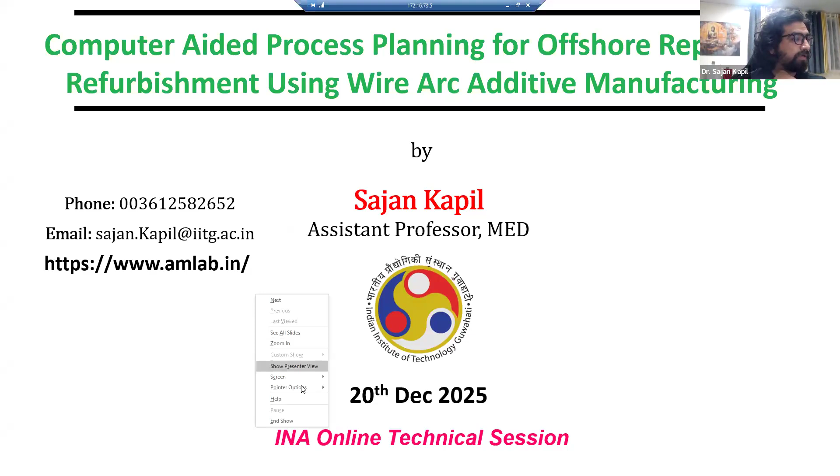So I'll be talking about computer-aided process planning, particularly focusing on the offshore repair and refurbishment using Wire Arc additive manufacturing. In this particular talk, I'll be going through first an introduction to additive manufacturing, which will be very brief, so that we are on the same page when I say a few terminologies. And then after that, it will be more focused on underwater application. That will be today's goal.

So I'll start with this video, which I typically do. These are the birds known as swiftlets. These birds are building their nests. They are using their saliva to deposit material. So unlike the conventional way of building nests like other birds do, these birds are utilizing the method of additive manufacturing.

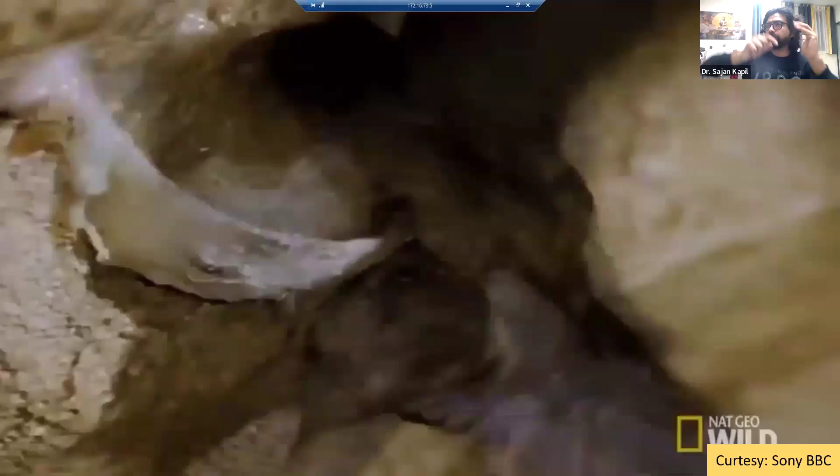This is 3D printing, where you are using any base, which may be a straight base or slanted base. Like here in this case, it is a cave, which is not straight but slanted. And then they are building their nest onto that. What does it require? Of course, the material is known to these birds. The requirement is the skill to deposit material, where to deposit, how much to deposit, so they get the shape. This, in the modern world, may be called computer-aided process planning.

If these birds are replaced by robotic arms and these materials are replaced by some other material, let's say metal, we choose additive manufacturing. This is a classical example of additive manufacturing in nature, but we do not really promote pursuing anything and everything by 3D printing in our lab. And this is another example.

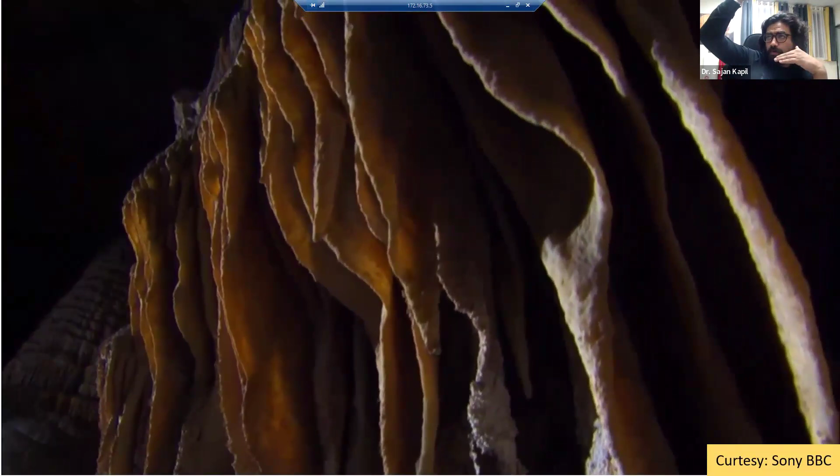This is an example where the water leaves the limestone cave. It falls from the roof onto the floor of the cave. When it does so, it leaves material behind in two places. One on the top, that means on the roof, another on the base, I mean the floor. These two material depositions keep growing, and they meet. And that's why in the caves you see those column-like structures.

These column-like structures are not made by removing material. That means the water did not cut away the excess material by its flow and give the shape to these columns. No, they are deposited. These structures you can't really get by conventionally removing material. You have to go with 3D printing. But there's a challenge. Growth of this particular structure is a few microns in a year. And that's how 3D printing typically is, right? It's sometimes expensive, sometimes very time consuming, sometimes it can't handle the material.

So keeping all that in mind, we always recommend keeping a combination of additive, subtractive, and other conventional manufacturing processes in mind. So with that brief introduction of additive manufacturing in nature, now I'll jump to additive manufacturing. What is it? It is typically known by many names. I'm very sure you might have heard one of these names.

3D printing, stereolithography, layer manufacturing, additive layer manufacturing, additive digital manufacturing, additive manufacturing, layer-based manufacturing, layer-oriented manufacturing, solid free-form fabrication, digital manufacturing, rapid prototyping, rapid manufacturing. So all these names are typically given to this technology, and there's some reason for that. And maybe at the end of the talk, I'll mention where you can learn more about 3D printing.

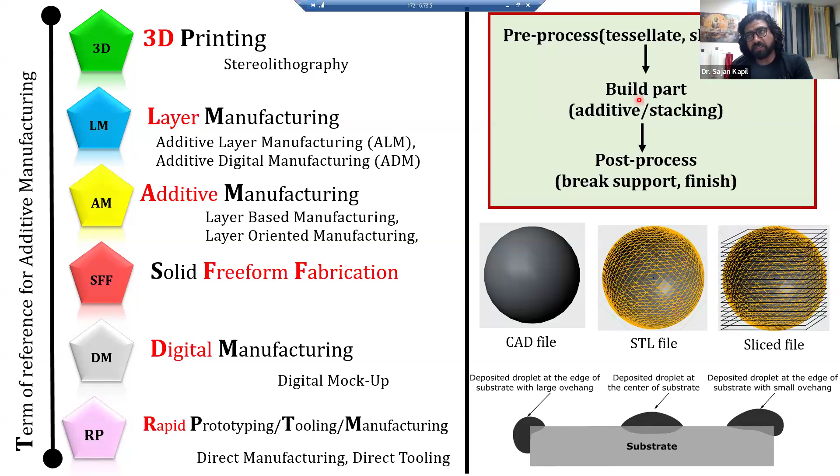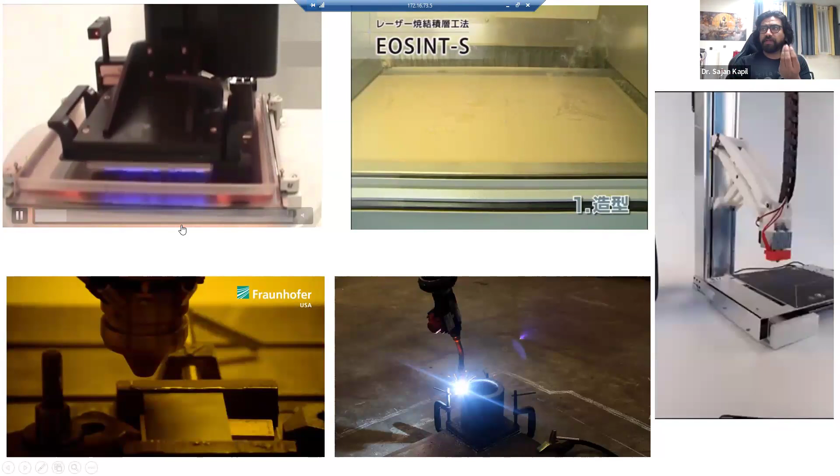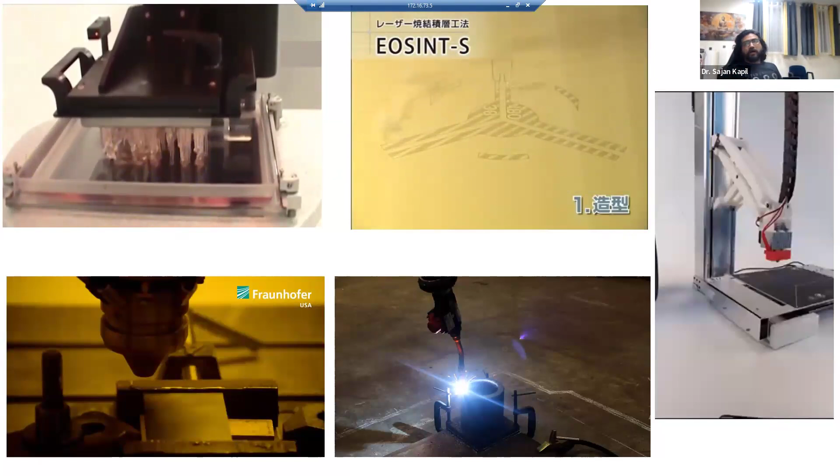Now, in summary, I'll show you some of these processes here. Like I said, this is the vat photopolymerization, right? Here you are giving light from the bottom, and that light makes sure that the material is getting deposited onto the layers. This one on the right side is powder bed fusion, in which you see a layer of powder and the laser writes over that powder bed. Wherever the laser falls, that portion of the powder bed gets fused.

Or it can be a process like this, the material extrusion, where, as I already mentioned, the wire is coming, is getting melted and extruded through a tiny orifice, and you keep collecting the deposited material. But the bottom two are called DED, directed energy deposition. As we are today talking about ships, right? The large scale structures, obviously, and metallic. Most of the things are metallic.

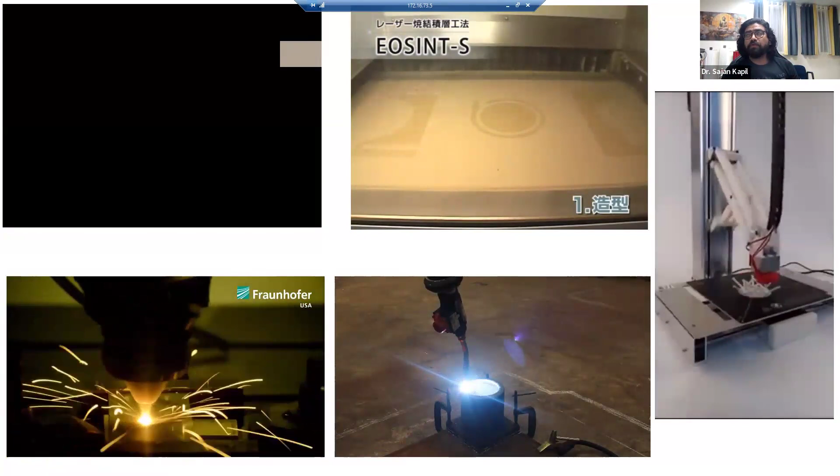I'm not going to talk about the FRP or the composites. I'll be mostly talking about the metals. But of course, if required, maybe some other time, we can talk about utilization of 3D printers to fabricate large scale plastic parts as well. But today's focus is on metal. So this is the process which you see on the bottom side. DED, directed energy deposition, is the most suitable process for that.

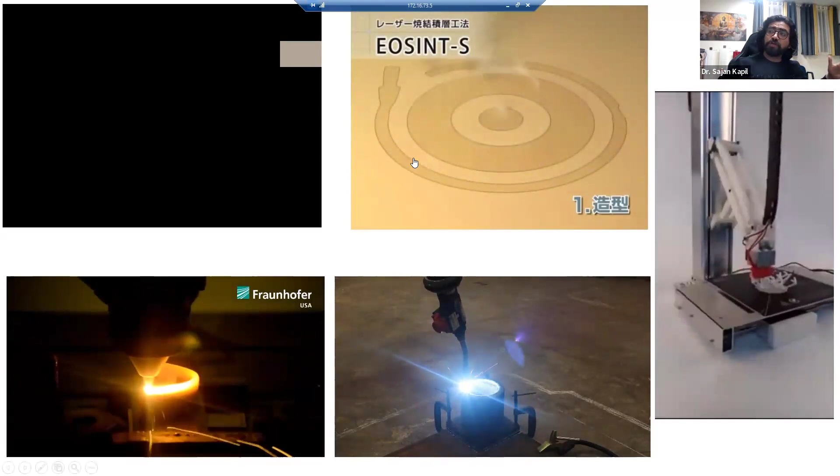Because here you don't have a limitation of, for example, in powder bed fusion, how large you can spread. Assume that I'm spreading a very large bed of powder, which is 40 micron thin, on, let's say, a 1 kilometer area, or let's reduce to maybe 50 meter, which is not very large for DED, or maybe 1 meter. It is very, very difficult. I mean, 40 micron uniform spreading itself is a nightmare. And then, of course, there are other challenges coming up.

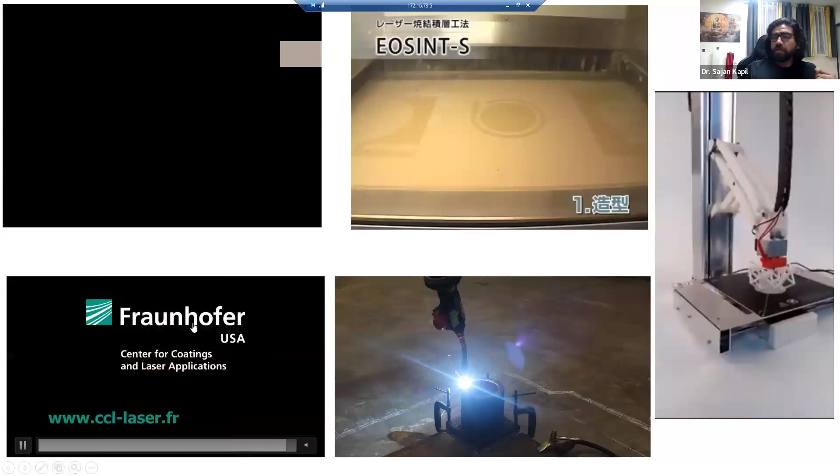While in DED, assume that this welding gun is just depositing this cylinder, right? What if I put it on a truck, or on a robotic arm, and just deposit at one location, move to the next location, deposit, go to the next location. There's no limitation on the size in this process. Particularly the right side one, where you have welding guns in your hand. Not the left. Of course, there are issues with the powder also. Handling powder in an open environment is another challenge.

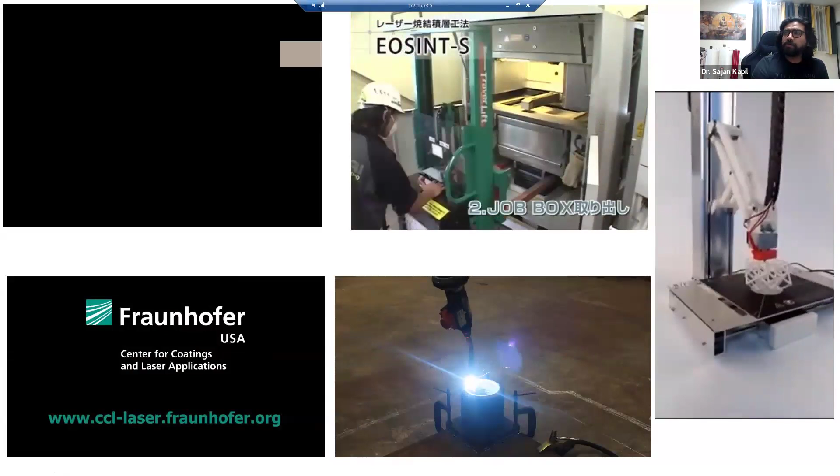But this DED process, which uses welding guns, has a lot of potential. It looks like just a welding process, a welding gun mounted on a robotic arm. As I already said, welding guns are there, robotic arms are there in the market. Now, what are we doing? We either do the material analysis and find the right material, or if the material is existing, for example, in shipbuilding or construction, mild steel is a very well-known and weldable material.

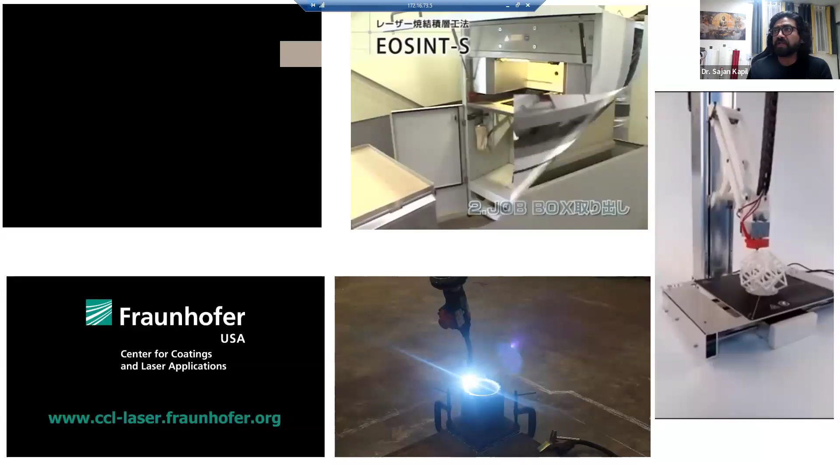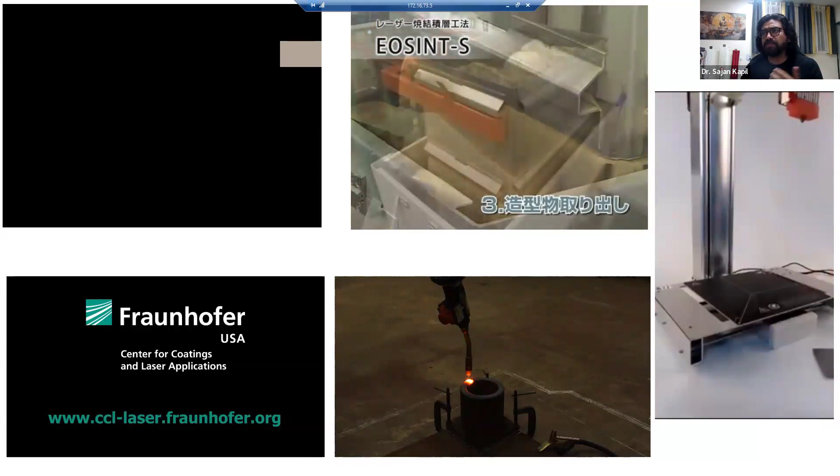So the expertise required is for computer-aided process planning. How do I plan my deposition process so that I can build structures? And that is not an easy task, because there are a lot of challenges on CAD and CAM. I'll explain through my presentation. You can control even a lot of material properties through this, just by planning the path.

Now, is it new? Is what I'm talking about a patentable thing? No, definitely not. It is a very old technology. You see the first patent filed on this invention. Somebody came up with the idea of, why don't we use a welding gun and keep depositing and make something. But then it may not be an engineered product. It will be something like a decorative item.

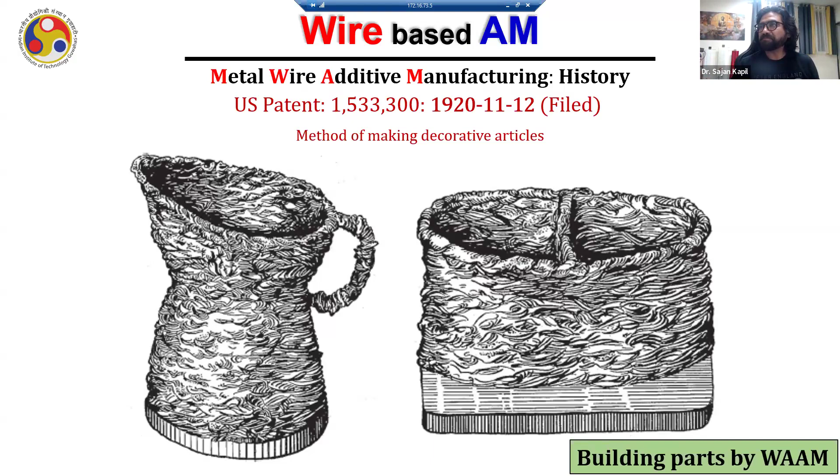Chalo, maan lete. But once you replace those hands with a robotic arm and the welding gun with a very sophisticated welding gun, then it becomes wire arc additive manufacturing. But the idea remains the same. So I don't think there are many IPs in the process. Of course, there are IPs on many other aspects, but the process was a very open 3D printing process. You can see the first patent of 1920. I faced this challenge when I made my first propeller at IIT Bombay working with Professor Karunakaran sir.

I see that challenge in industry when we try to build something. There was a hesitation in accepting those parts because they think it's welded, and welding is not good. So at that time we used to argue that if you have even a single weld, that property will keep propagating. If that weld works, that means the whole thing, even if you make it by welding, will work. But it was difficult to mitigate those challenges.

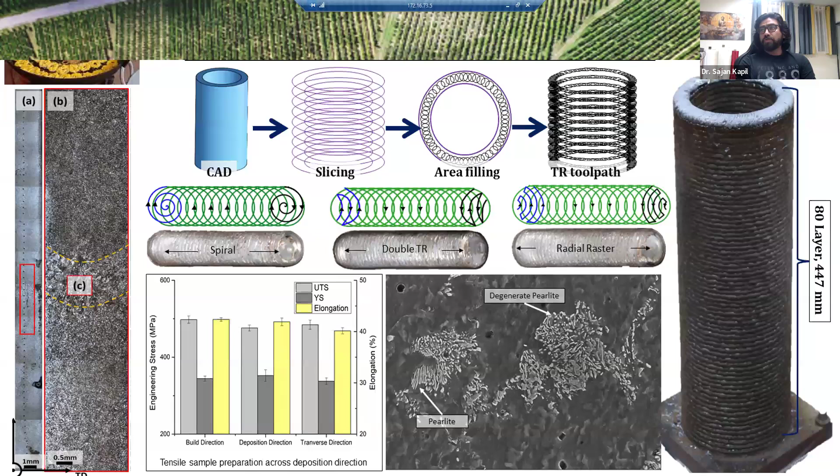So I'll directly start with a very important tool path, because I'll not go very deep into tool path. We usually go into the math level of it, the CAD part of it: how do I generate interesting tool paths, what's the math behind that, and then the algorithms for that. I'll not go into that, but I'll show you one very interesting tool path which gives me very interesting results.

It's called trochoidal tool path. Trochoidal is not a very new thing. People have tried this path, but typically in machining, not a lot in 3D printing. I'm not saying it was not tried. Of course, this is a well-known path in mathematics. So how does it work?

If I want to deposit material inside these, I will not just deposit circular, one circle then another circle, not like this. Instead, I'll deposit like a jalebi. You see this? And of course, we were not inspired by jalebi. This is just an analogy I'm showing you now.

But what are the benefits I'm getting when I deposit with this, at least with the mild steel grade I have, and this is a published paper: I was able to penetrate more into the base metal. Why can't I do that with a single track? Because you deposit less material above the substrate if you just go straight. But if I keep going like this, I can deposit a lot of material, 6-7 mm thick, with the same wire. The penetration is even more.

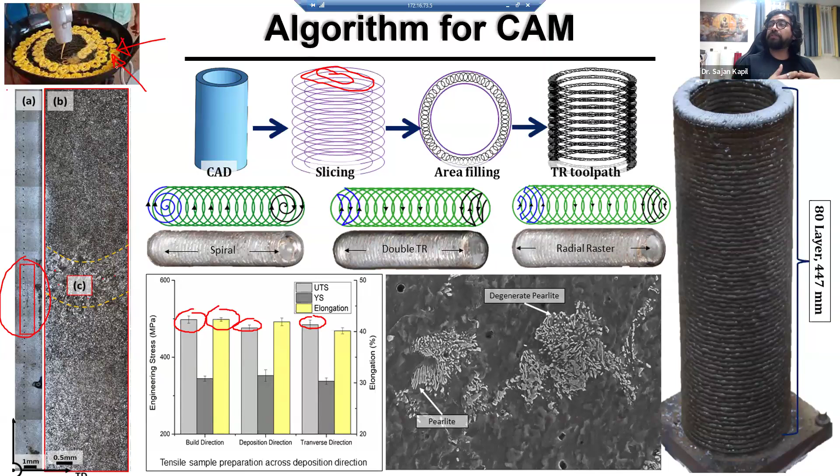And how did we do that? Just by changing the path, the way we are printing the material. Now, I'll again go back to the analogy of jalebi making. Of course, you think why can't we just deposit jalebi like this? We will deposit the same amount, but there are reasons. You can print net shape and then break it. So this path affects a lot of things inside the metallurgy and the mechanical properties.

Or can I, for example, deposit material with different microstructure at the desirable location? Of course, I can build the part, put it in a furnace, do the heat treatment, and get the desirable microstructure. But can I build a part in which I have some desirable microstructure here, something there, something there? Imagine what kind of heat treatment would be required. But I can do that with toolpath. I can plan how much heat to provide at this location, when to stop my welding gun, and how to cool it down. Those cooling curves I can engineer while depositing material, and I can assure that it will give the right mechanical or microstructure requirements.

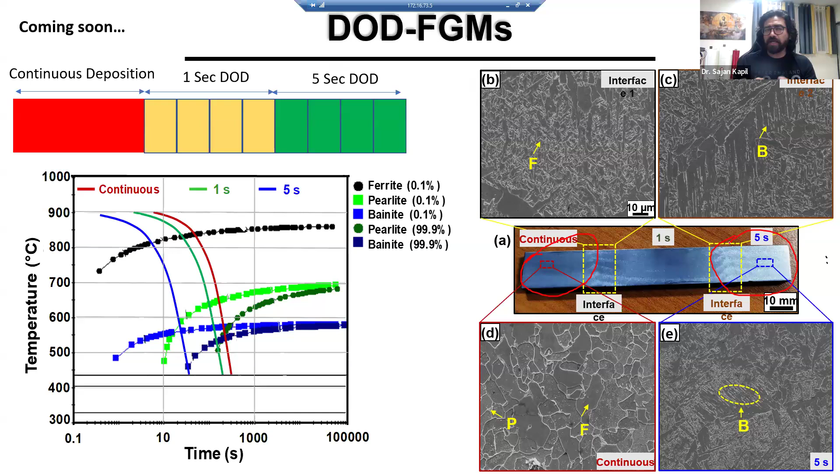So it's like reverse engineering, with the metallurgist being a doctor giving me a prescription: I want this microstructure at this location, and these are the cooling rates. Can you plan the path in a way that I can get the desirable outcome? So this is one.

Another one is engineered porosity. Of course, porous parts are not a new thing, but these pores are closed. Open pores are easy to make, we know that, foams and all, but closed pores in metal are challenging. And those are engineered pores, right? See these two blocks. The one on the left side is weighing 475 grams, and the right side one is weighing around 520 grams.

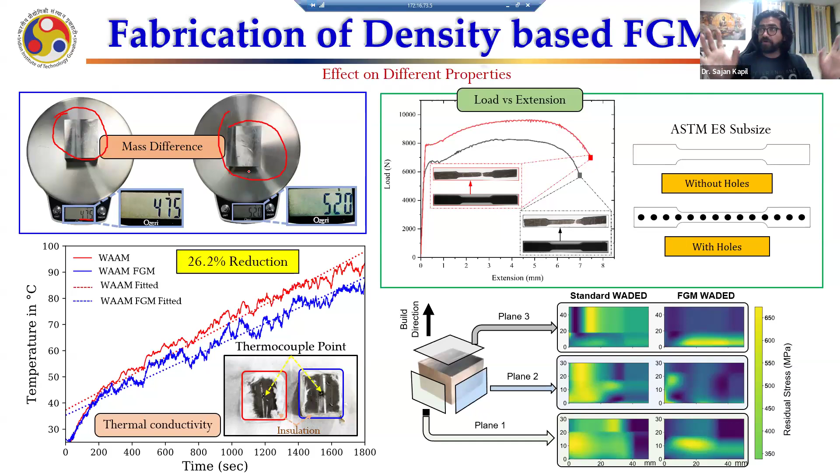The weight is different, but the shape is exactly the same. There is no difference in size of these two blocks. And we could do that. I'll just very quickly move, because I don't know.

Amir, please remind me when I have at least 5 more minutes. Sure, 5 minutes.

Please, thank you. So, for example, I deposited a layer. Then I can make tiny holes into that. Now, if the size of these holes is less than a certain value, the material will not go inside. You know why? Because of the viscosity, the surface tension. Each molten material at a particular temperature has a certain viscosity. And it's quite viscous, of course, at very low temperature, and it doesn't flow at all, right?

At room temperature, the mild steel. But even if it is molten and at a particular temperature, in welding also, it does not go into these pores for some process parameters. Of course, we can control the temperature. So that's why I said temperature. That depends on the current, welding voltage, and many other parameters also. But those are my inputs, not the temperature. So I can cover these holes without letting the material go inside.

Now, this is an impossible part. You can't make it by powder bed fusion. With powder bed fusion, or any other process, the material will remain inside. And doing it with casting or forging, you just forget about that. I have no idea what the application of this is. Being an academician, we do some imaginary work also sometimes, but why not, in future, this kind of engineered hole inside parts may be required.

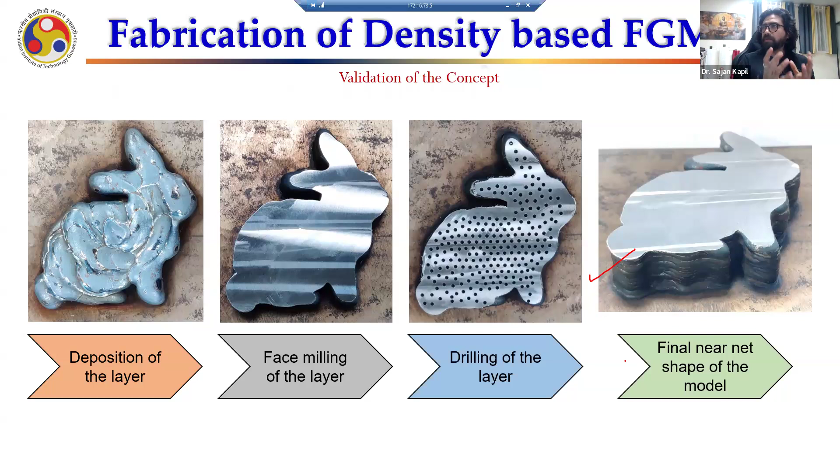How do I vary material? So density I can vary. You have seen, I can vary density. I can make it very heavy on this side, very light on that side, wherever you want. And you can't see that from outside. Outside, it will be nicely covered and without affecting its strength. Because typically, if you cover,

Sorry for this, just hold on. I'm sorry. Yeah.

So we can vary microstructure. We have seen that given a cooling curve, I can control my heat input at each location, and I can control the microstructure. I can control density. I can make a part very heavy at one end, very light at the other end. Can I vary composition? And why not? So this was our Indo-German project.

IGSTC funded that. And in this, we used plasma welding instead of MIG welding, in which we generate plasma at this location and we feed multiple wires from the side. Now, these wires, I can change their speeds at desirable locations. Unlike powder; I can do that in powder also, but it takes time and it's not really controllable by a programmer. You can define it for one layer, but if you want to change it very quickly, it's very difficult to program in one layer.

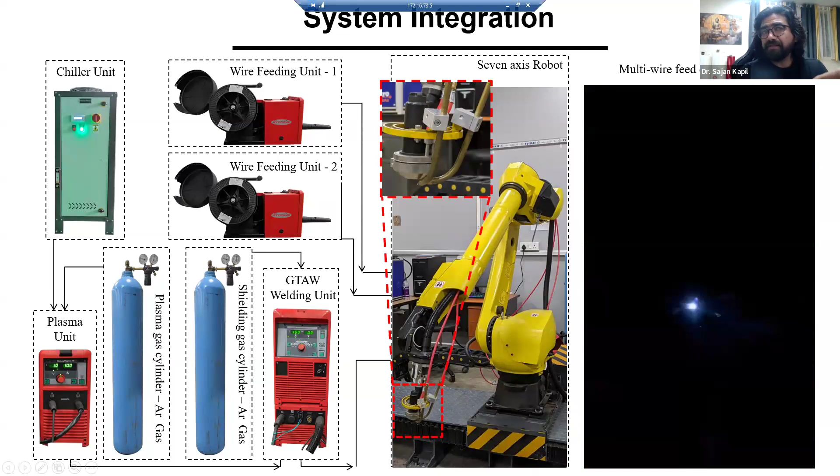It's just increasing the programming capability now. You see, to the left side I'm feeding P91, on the right side I'm feeding mild steel. And I can vary these compositions on the go. Now, sky's the limit. I can build walls with different compositions, mild steel, some variation in between, like 80-20, 60-40, 40-60. Of course, this is easy. I agree, this is not really a new thing, because in powder also people have been doing so for many years. But can you do that?

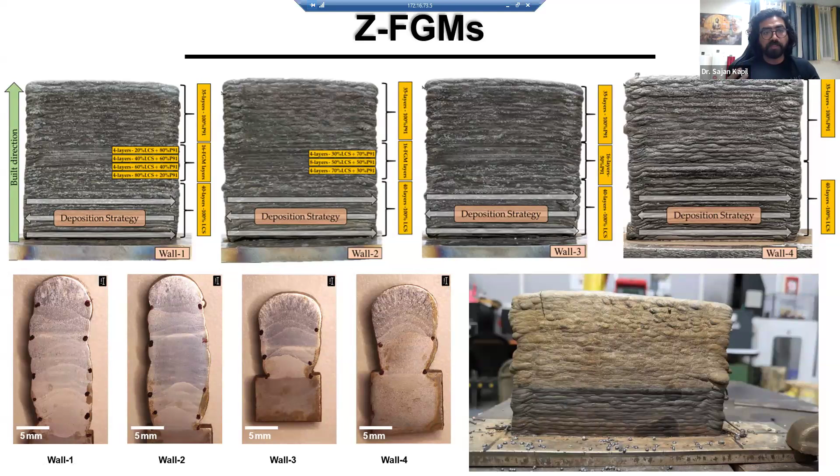If I give you a task, the audience, maybe you can think, you can make a CAD file in SolidWorks, right? Or somewhere. But can you give material properties to that CAD file, different at different locations, not only on the surface? Those are all B-reps, right? Boundary representations. But I want that composition to vary inside also.

This software will fail. Of course, I'm not saying there are no schemes. There are schemes to do that, maybe voxel representation, and there are many more. Computation is very expensive. Conventional computers may not even handle that. But we can deposit. And I can vary those compositions in 3D.

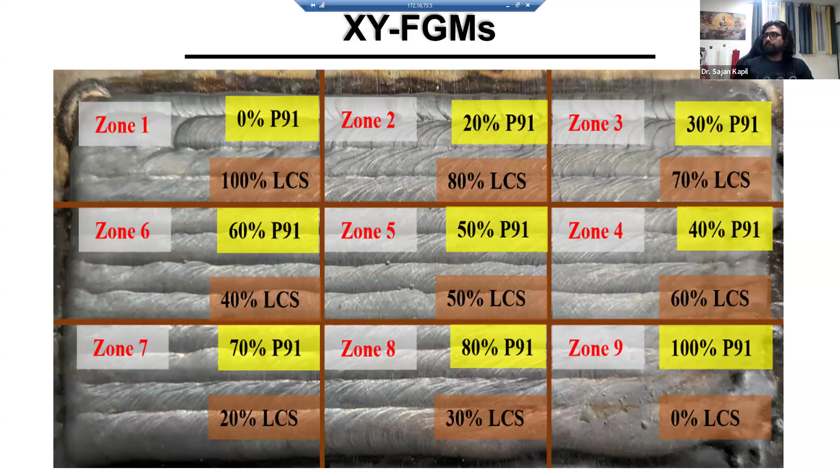I need to just provide the X, Y, Z location where my gun is, the angle of the robot I, J, K, wire 1, wire 2, speed. That's it, that's what I can control. So the whole environment is in a virtual environment. That's path planning, or computer process planning. I'll now go through some case studies, and that's where I think today's interest lies.

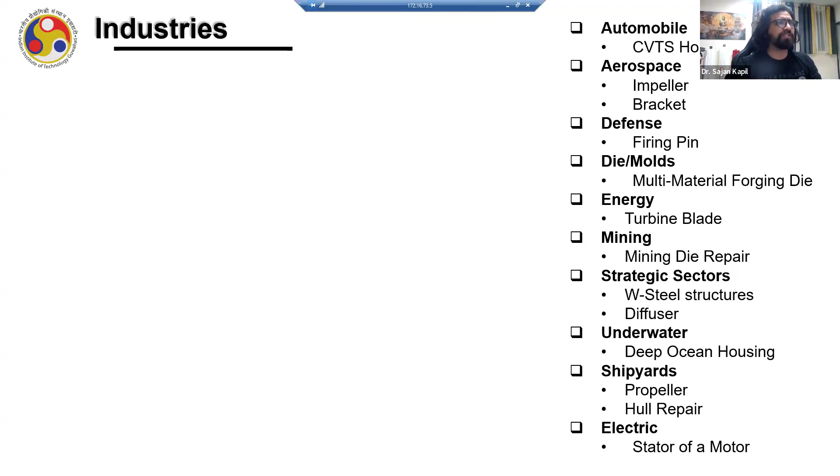Very quickly, we did one case study for automobile. This is an aluminum part we made. It looks like this after deposition, looks very bad, but then after machining we got the final part. It was a big part.

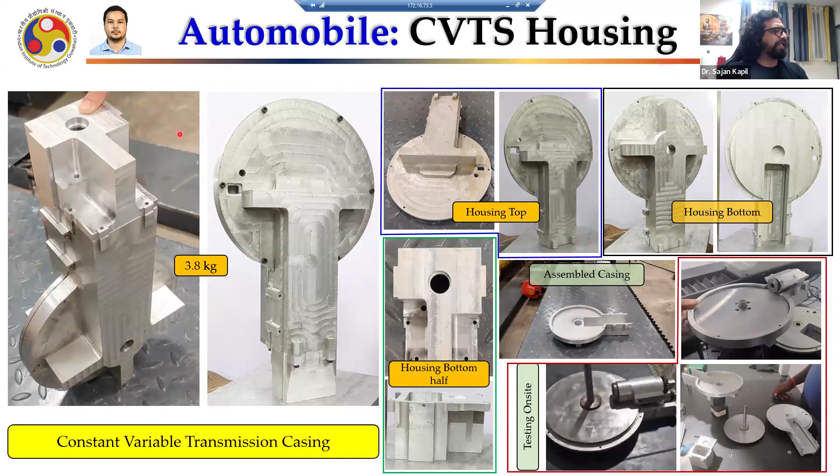You see this, around 3.8 kg, it required a lot of machining. We deposited well, we got good feedback, but I recently received feedback that there are some issues with the holes, not with the deposition. But because we are not experts in machining, I think some holes or machining issues are there. I recently heard, but earlier I came to know it was very well made.

We saved a lot of material, and they are trying it again to deposit through this. Otherwise you can imagine how much material they would have wasted. This is aluminium, a much more difficult alloy to deposit. Mild steel is very easy compared to this, because aluminium gives a lot of porosities and many such defects.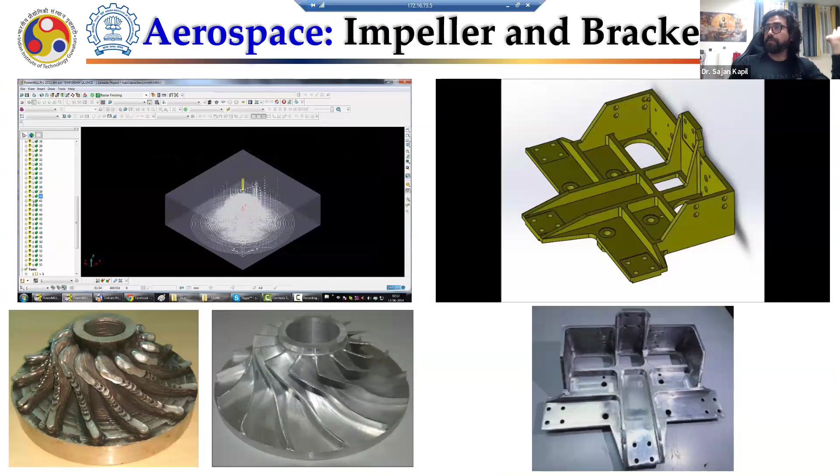This was my PhD work, at IIT Bombay. This work I did at IIT, not IIT Guwahati, I did it in my PhD. So the video you are going to see is from 2014, when I was working with Professor Karunakaran at IIT Bombay. You can see I have retrofitted my welding gun on a 5-axis CNC machine, and then I deposited material. Again, path planning was the only focus here, because realizing geometries at that time was quite challenging.

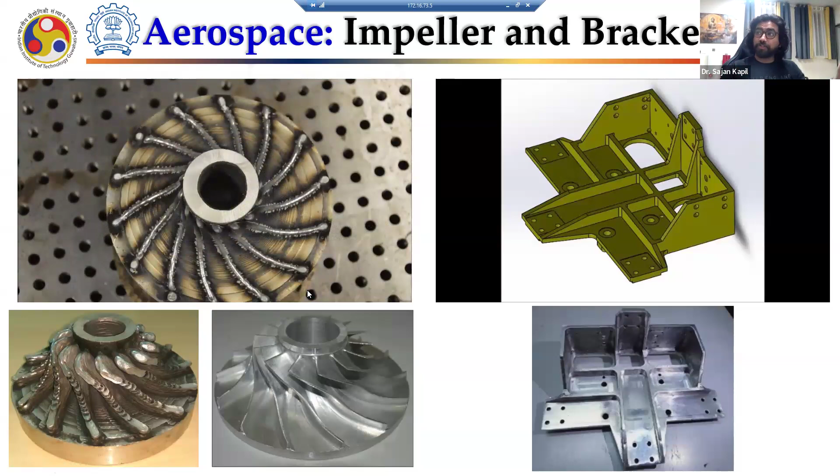Now, of course, all these companies and methods have come up, but this part was made in 2014, and I made, I think, 5-6 of them. This is the most successful one. This is the deposited part, and then after finishing...

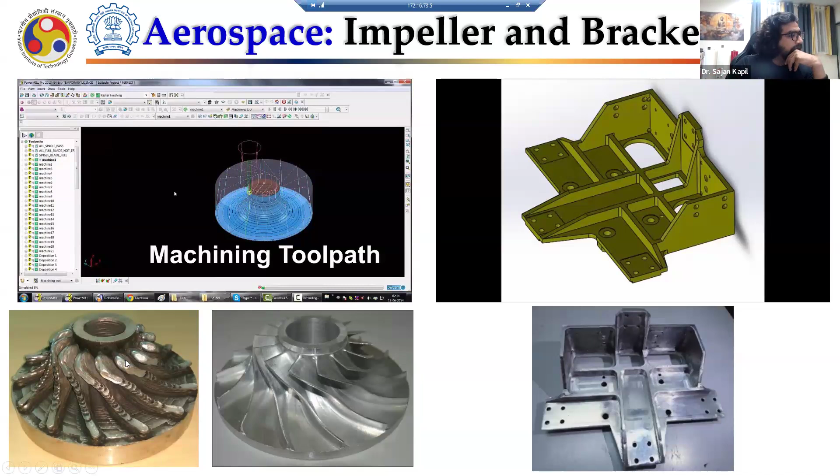This was also my PhD, I was also involved in building this part, a very interesting case study on how to plan depositing this part by 3D printing. It requires multiple settings, setting 1, setting 2, setting 3, setting 4, multiple settings of deposition, and then of course milling, and then you get the final part. That's how it looks like.

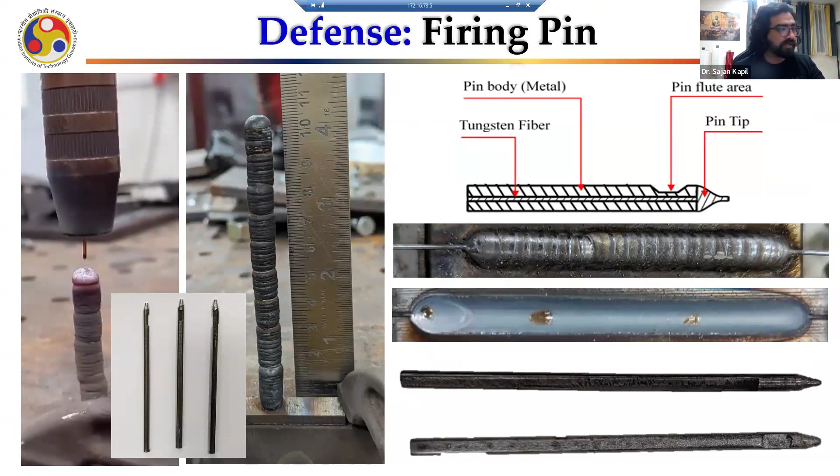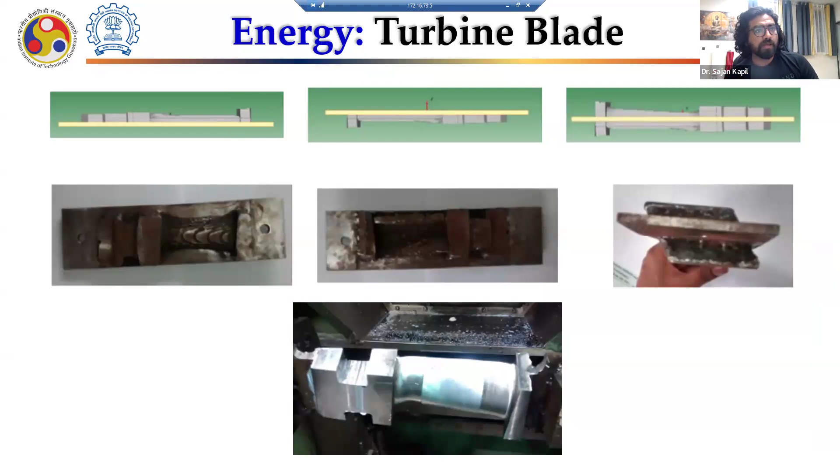We find it very difficult to make them convinced that it is also possible, but I hope now they are also trying to explore 3D printing, particularly DED, for making turbine blades, because definitely it's better than casting. This is the case study at IIT Guwahati we are doing right now.

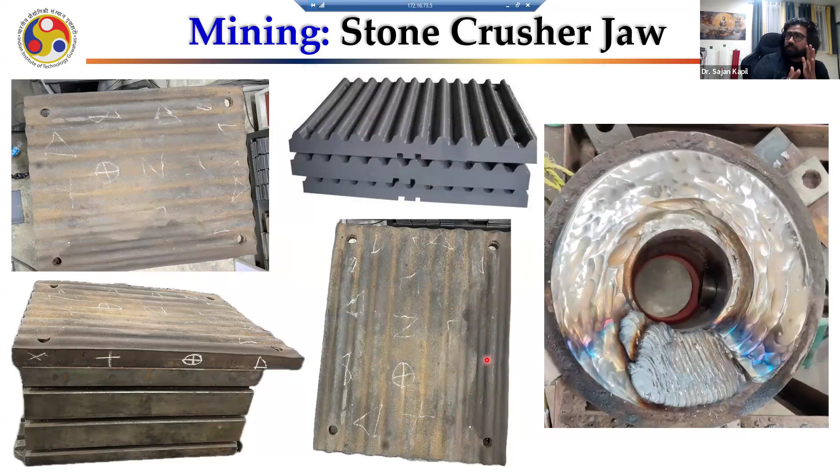This is a crusher, a stone crusher, that actually got worn out. When I say repair, repair doesn't come with a known shape, it can get repaired from anywhere. So we need a path planning which can even deposit like this, like you see here. Here the deposition is happening vertically, not like this, correct? I can even deposit upside down and the material will not fall by drops. So we have those path plannings again. If you try to do this continuously, it won't work.

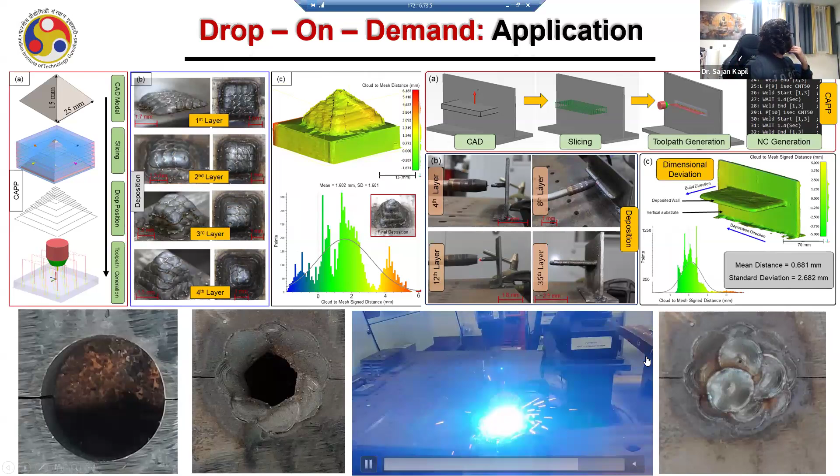The other one is the case we recently did for a space company. Again in this case, you see we are depositing material, and it's Inconel. Inconel is very difficult to handle because its conductivity is very, very low. And if the conductivity is low, what happens? It sustains that heat, it does not conduct that heat, and that becomes a nightmare for giving a shape because it flows like honey again if you just continuously deposit. So we have to take a pause, but when to pause, how to pause, so that the desirable microstructure can be achieved. We did that, deposited and gave it to them.

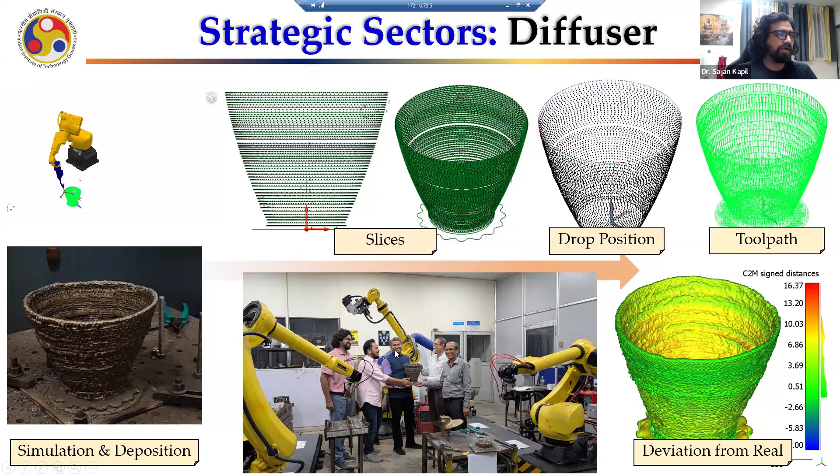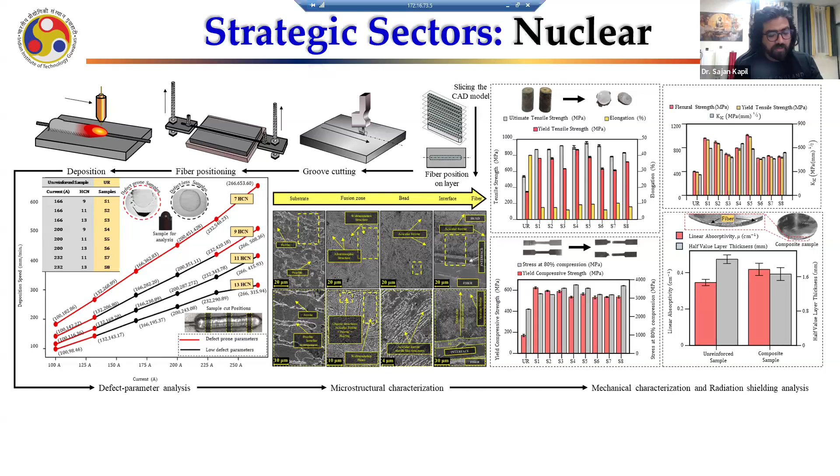They are testing it right now. There are some, we thought like if we put tungsten there may be an application in nuclear, but till now I could not reach the right industry where I can propose this, like I can put tungsten into the wall because tungsten absorbs radiation. But I can give shape also to that tungsten. I can make a circular cylinder which has 40% loading of tungsten in mild steel. It will be strong as well as maybe absorbing nuclear radiation, but maybe some other applications as well. Happy to hear if you suggest something.

You see this wall? These dots are tungsten fibers, and this is only 12%. We are recently going to publish one more paper on how to load 40% tungsten into mild steel.

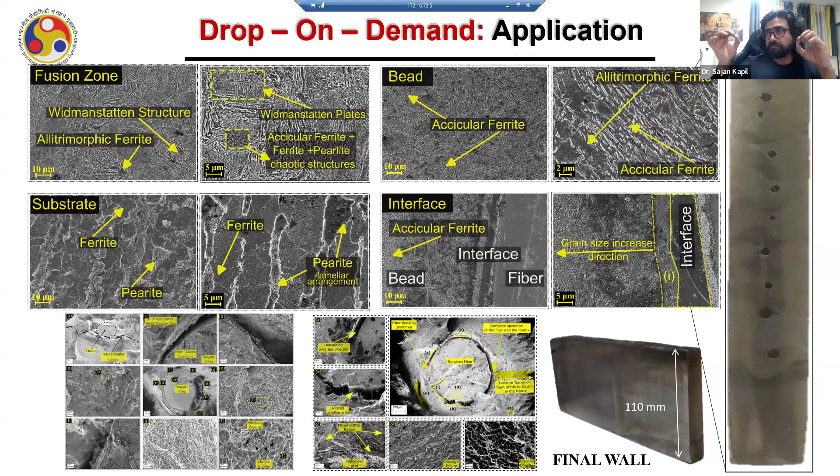Of course, one interesting case came, but I have not started working on that. I don't know from where, but they want titanium fiber into aluminium. So I know it will require some inert chamber and all, so I'm working on that. But that could be the next metal matrix composite by 3D printing and the planning. You can't really just put it and then deposit, it won't sustain, it will break. There are a lot of issues. So path and appropriate planning has to be done for placing those fibers.

Now the water. One of the mandates for my Indo-German project was to build something for underwater application. But it's a myth. Of course underwater is not explored much, right? And we don't know whether a part built by 3D printing will sustain or not. So we built a part, an electronic housing kind of part. We gave it to NIO Goa, I'm very thankful to them. They tested it, put it in a pressurized chamber, and found no leakage. I think they put it up to 100-meter depth, equivalent to 100-meter or 200-meter depth pressure. Now I'm trying to build another part, which I'll try to send maybe to Chennai. They were kind.

They said when you are ready, I'll send them. They will also test it for maybe more depth, up to 1 kilometer or 900 meters, whatever facility they have, but it doesn't leak.

This gives us the final product result. I'm not putting a lot of analysis here because I just want to show that. Of course, we can discuss once it is failing, how it is failing, the fractography of that and all.

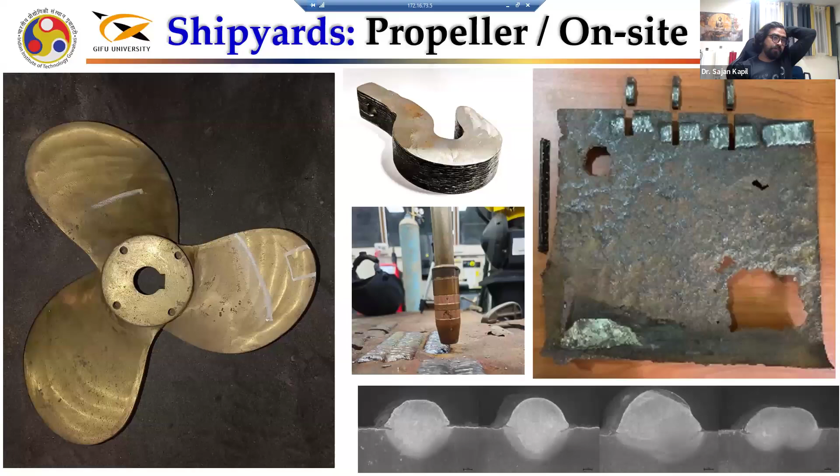This is an interesting case on the right side, from Japan. They want us to repair a plate from the 70s through this technique without removing the rust. And we did that.

We find again a path. If we deposit by that path, it just pushes the molten material, because the rusted portion, rusting is a lighter weight material in this case, particularly in mild steel. The rust is lighter. When you deposit, it floats up.

But if you push it away, you can see here, these are 3 beads. We keep pushing it from this edge towards this. Without removing the material, you can repair these sheets. I don't know, but maybe in future we'll use it.

We made this crane hook also by 3D printing. Then I realized we should do a proper study. I'm very thankful to my industry partners, Saraswati Metal Works. They agreed to give me one propeller.

They made a deliberate cut, actually 3 cuts. One like this, another a 90-degree bend. For the third one, they just reduced the thickness, a lot of thickness reduced from this portion. It's a bronze alloy. We took a task.

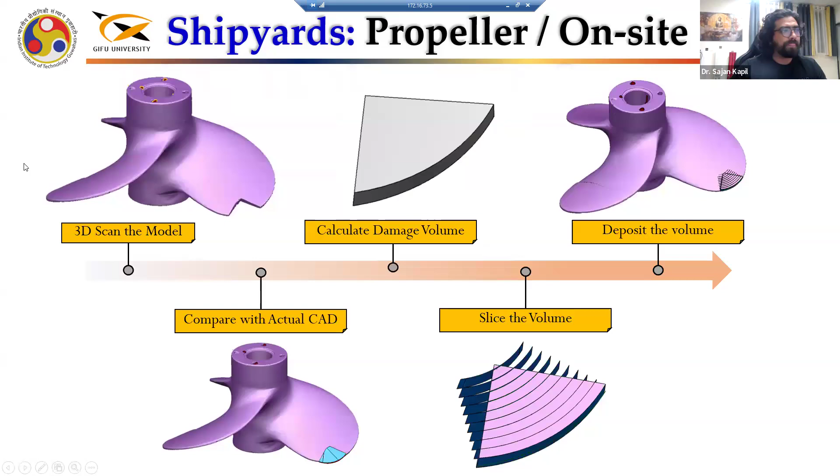We started with planning it. There is a lot of planning on how to fill this sharp edge, how to deposit this sharp edge, and then finally we can deposit.

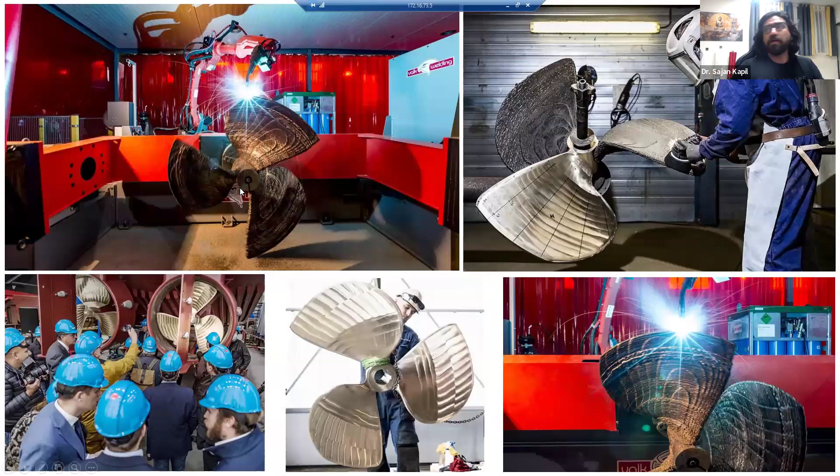But I'm not new to this. Rotterdam already did that. They call it the WAAMpeller. Of course, these are all images from them. Inspiration came from them.

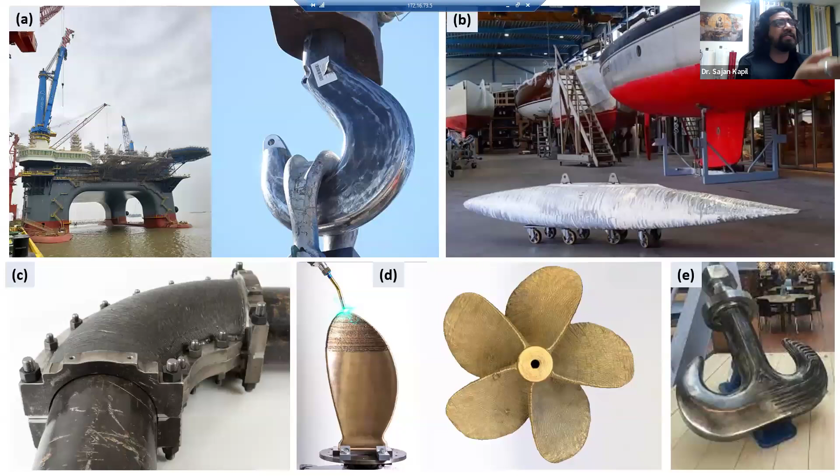But these are some other applications I found online through scientific papers and articles. People have already done this for WAAM repair in offshore. In offshore, they put a welding gun on a robotic arm, deposit material, and get it done.

So the first task was selection of material, because the composition of the base material was having quite a bit of zinc, you see that? But zinc is difficult to handle, it evaporates, there are a lot of issues.

So we chose that copper silicon is not a suitable material because it lacks strength, cavitation resistance, and long-term seawater durability required for structural repair as compared to NAB. So we chose the nickel aluminum bronze, which does not have those issues, it's easily weldable, and we can repair and utilize that.

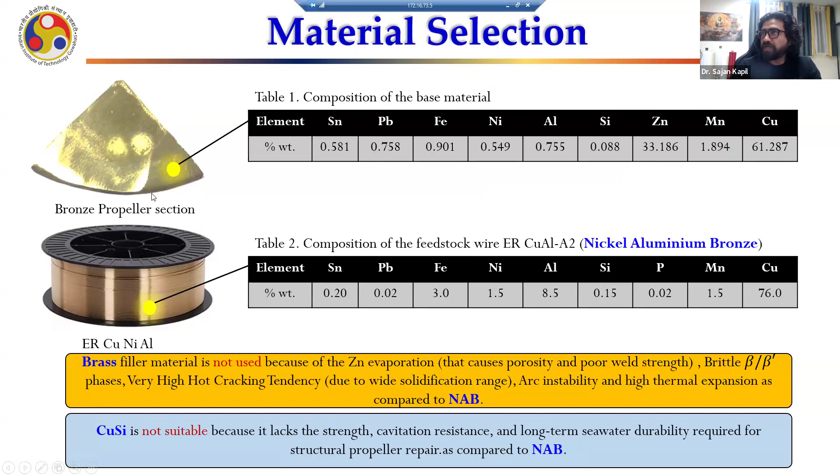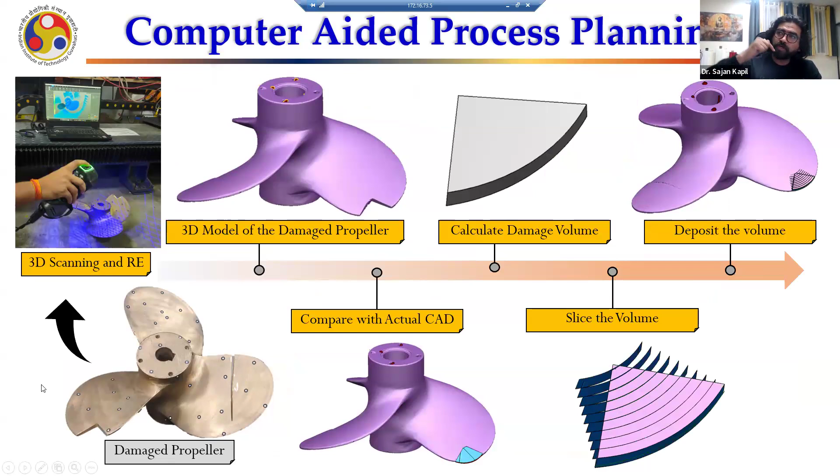So this is the wire we use. We scan the part, like I said, these are the cuts you see, very bad cuts. This is impossible to repair almost by manual labor. But again, if we do a robot task, we could manage.

All this is path planning. I think I'm close to my deadline, right? Maybe I'll skip this conformal slicing.

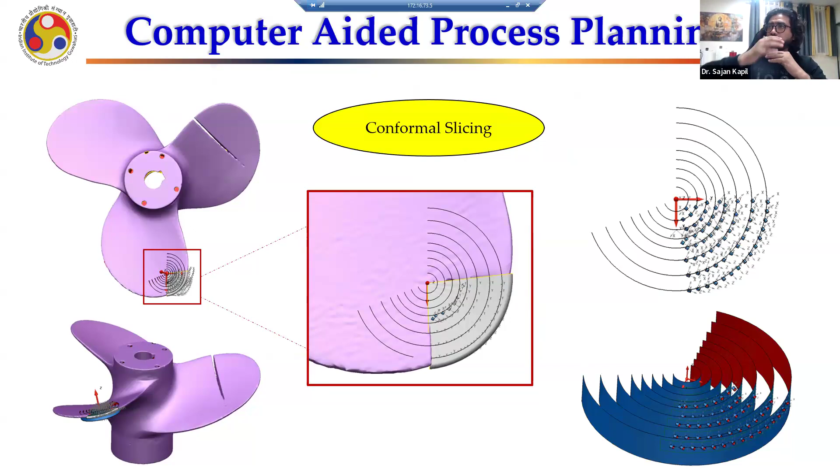Like I said, in this case, you do not deposit layer by layer like this, but in a conformal fashion. Then we deposited, you see the video here.

How much it is stopping, when to stop, was all planned earlier through depositing a wall and testing its microstructure, mechanical properties, everything. That was very important. Later on, I'll show you the results.

This is how the deposited material looks like. Then we can grind it off. Wherever we see the defects again, we can repair those locations particularly very quickly.

This is the repair of that very long cut. This was actually the most difficult part.

Because when you keep depositing like this to regain the thickness, it was most difficult because it was very thin. And if you deposit material on a thin blade, it will definitely warp. We have to avoid warping. So we planned the tool path in a way that it does not warp.

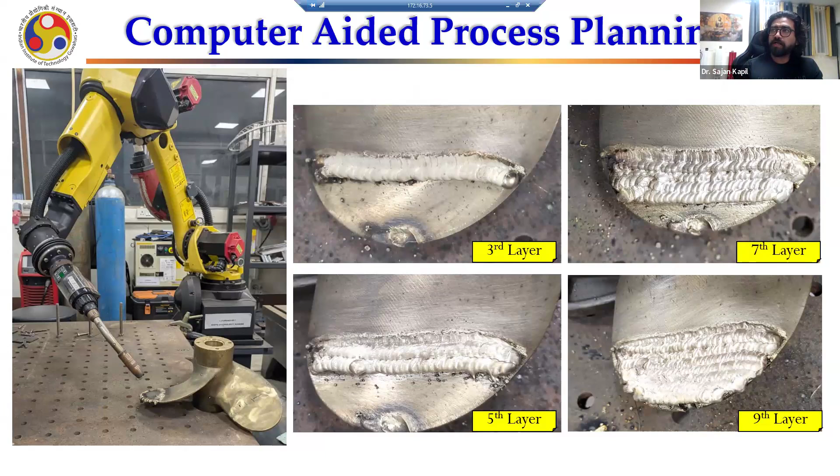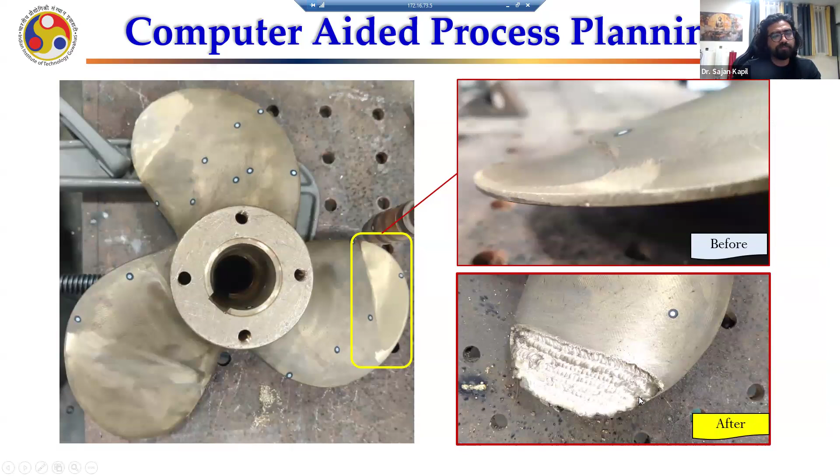So this is before and then after. Of course, this is the earlier one; you see the portion, it's literally gone, right? The thickness. And after that, we could deposit. Finally, there's a part we could grind off and provide it to them.

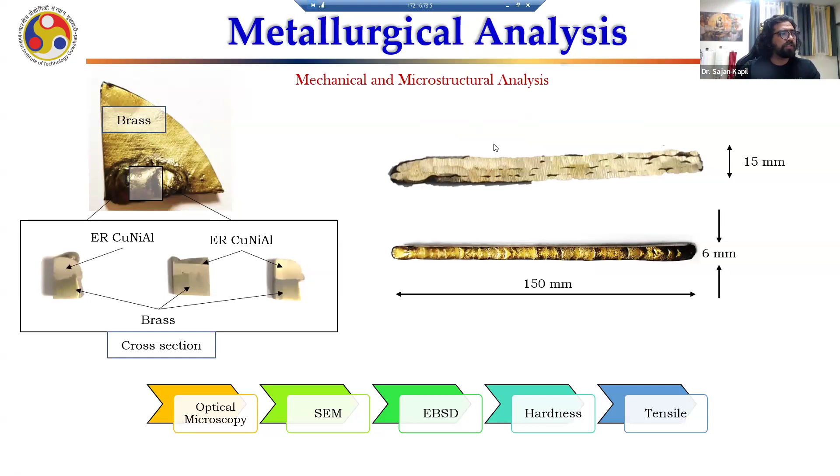Some metallurgical analysis I'll show you. We deposited first. Of course, we took a broken part because they made a deliberate cut, like I said. We deposit material onto that and did the testing. We find that the grains in the deposited part are quite smaller as compared to the base.

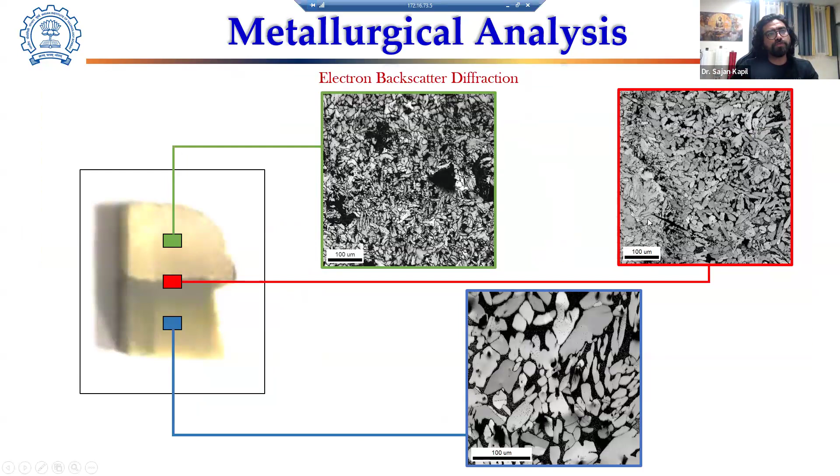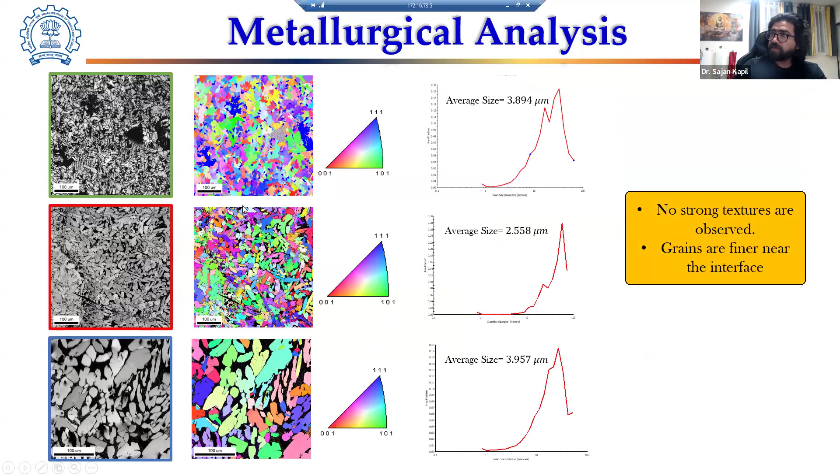And that's because the base one is the casted one. You see in detail the EBSD for the same portion over here, and at the interface also you can see the nice merge of the grains. They are not very small, and a very sharp change was also not observed. The EBSD texture shows quite random colors here. That means the orientation is quite mixed, not biased in any direction.

Okay, we observed it on the bead. Bead, when I say it, is the deposited part, then the interface and the base. And of course, the base looks different. The reason is obvious, because it's a casted part, right? I mean, the base is casted.

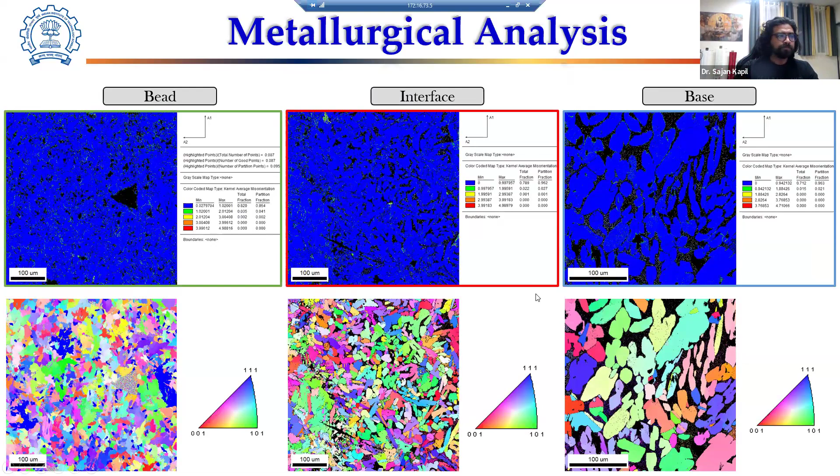The elongation was low, actually, and we can obviously see the reason for that. But if required, we can provide heat treatment later on. But this was acceptable to my funding agency.

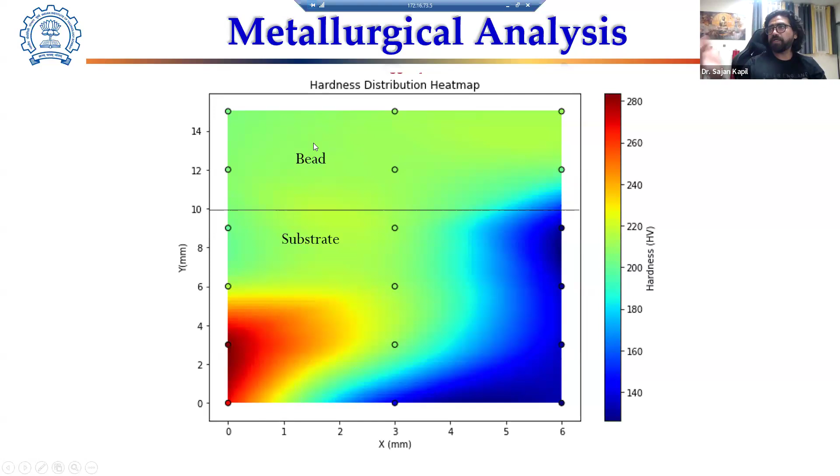We deposited extra deliberately because we then need a good grinding person who can grind that tip, which gives it the right profile. So we didn't do that. But that gave us a new project.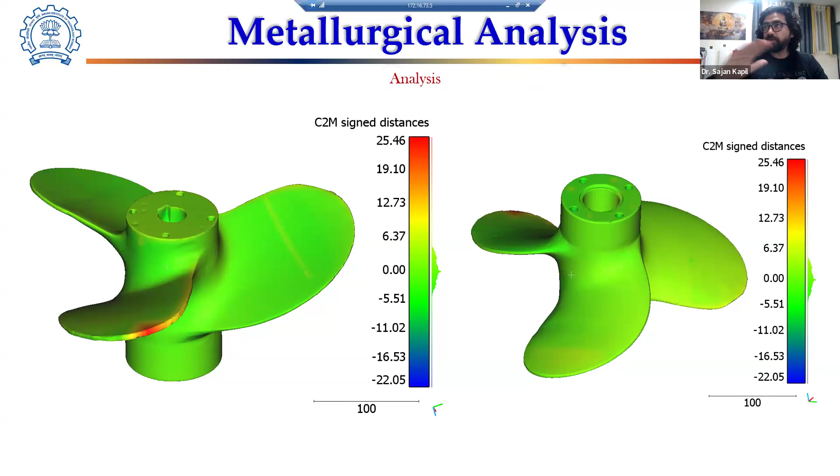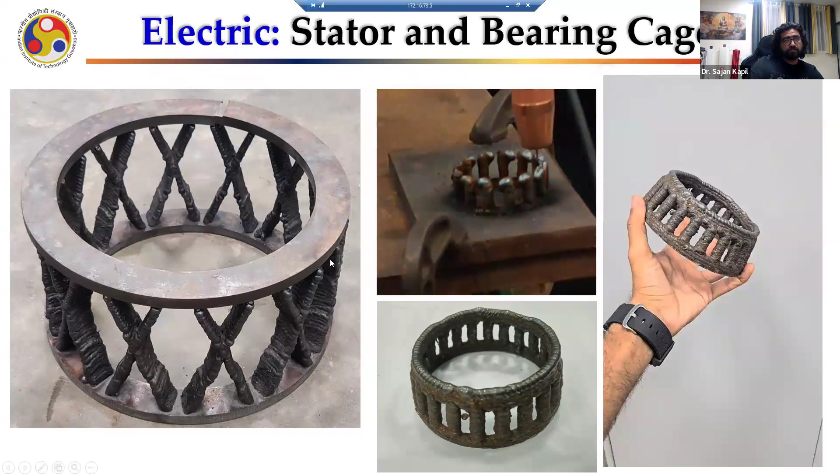This is a very interesting case of a bearing cage, where the challenge is how to make this 90-degree deposition without any support. And we can do that. WAAM is a process which can create very, very complicated parts without any support. Some other cases of deposition, I'll skip those.

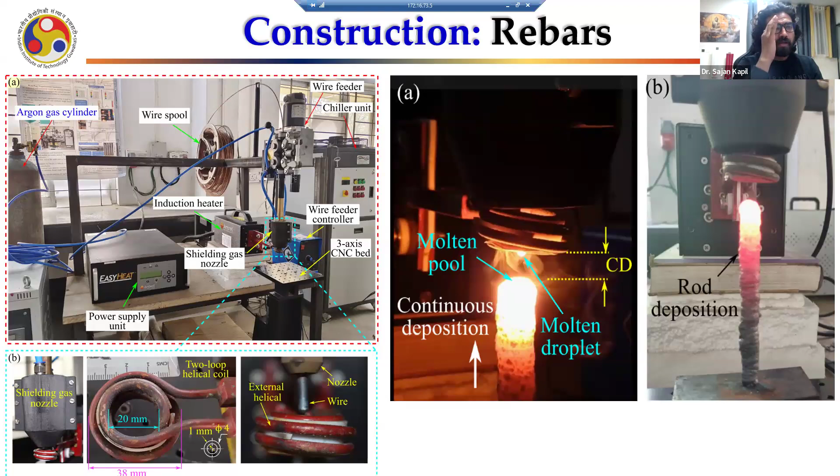Work like a conical heat source. So we are working. We got some success. I'll come back to that later. But this requirement came from L&T. They said, can you make rebars?

Maybe it looks very futuristic to you right now, but that could be the future, where you don't want to carry such rebars like this in a truck, but in the form of coil, and the robot itself can print on site. We printed. These are the rebars printed, tested on concrete. They have tested it. They provided feedback, and the bad surface finish you can provide deliberately.

Why have solid rebars? Why can't we have hollow rebars? Hollow rebars you can circulate water through. It can cool down the concrete. The same water can be reused. How much water we waste, you know that in the construction industry. Imagine all the rebars are hollow and connected.

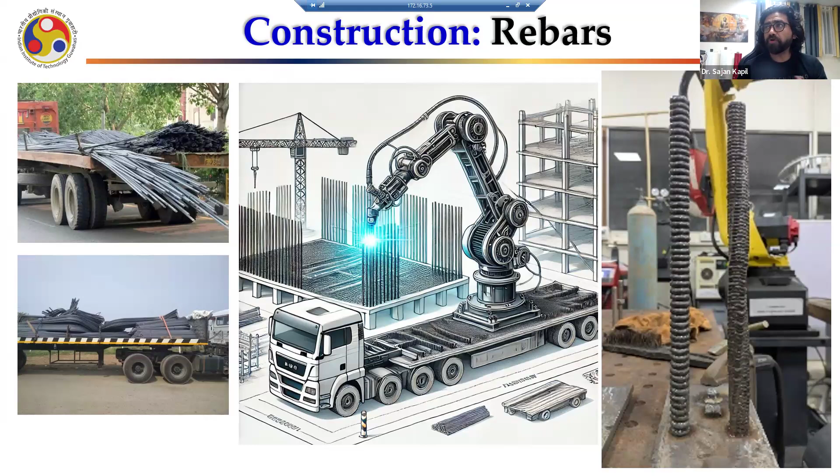You supply water from one end, circulate it through the entire building, and then collect it back, cool it down, and then again supply. Of course, very ambitious, but that's our research part. But L&T was keen, and we had multiple rounds of discussions. All the rebars are made by continuous casting or extrusion. Getting it hollow is impossible. But we can definitely do that with 3D printing.

So all these case studies must be motivating to you, what this robot is doing in the lab. It should come out and work on the site. So we submitted a proposal and are still waiting for a few approvals on how to make a mobile van. Mobile van means the robot is in a truck. It can go there, work there, and then come back. That's where it will work for the offshore industry.

I recently had a meeting with the Navy. They showed me a very big shaft, around 500 diameter. It was worn out from between. They currently put FRP and temporarily repaired it. Imagine a robot would be there and it would have just deposited that worn out portion. It would definitely be better than FRP, right? But there's a requirement now.

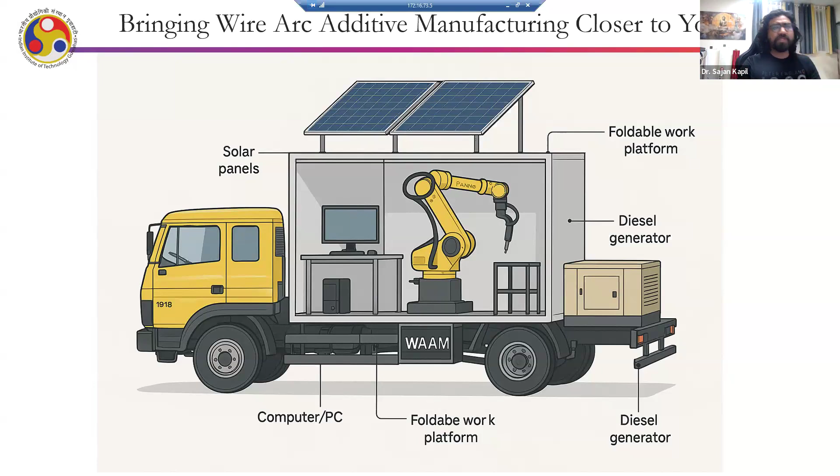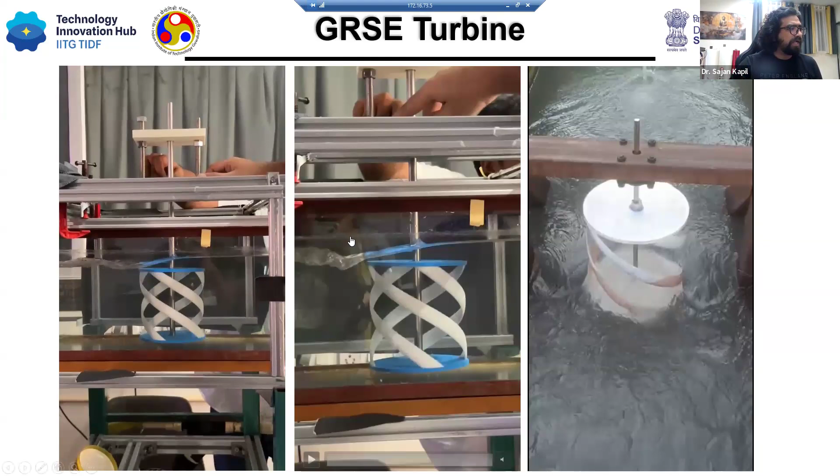These are some trials. We are finalizing the shape. So we took the profile of the blade from the research papers, and we are testing whether the shape will be perfect or not. So we made a small setup for testing. It looks like it's working. We are measuring the absolute RPM in different orientations with velocity, and then how many turbines to be put.

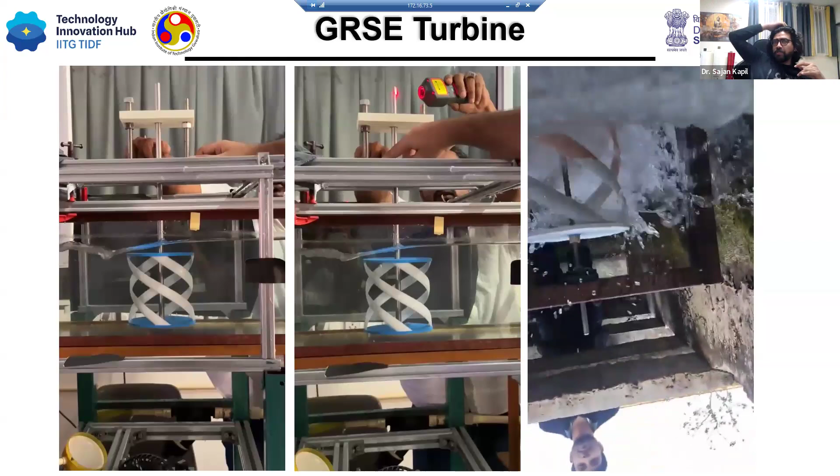So these are all 3D printed turbines, but plastic. We are going to use our robotic arm to build those large turbines, hopefully soon. We already procured the material, and with the help of GRSE, we are progressing on that.

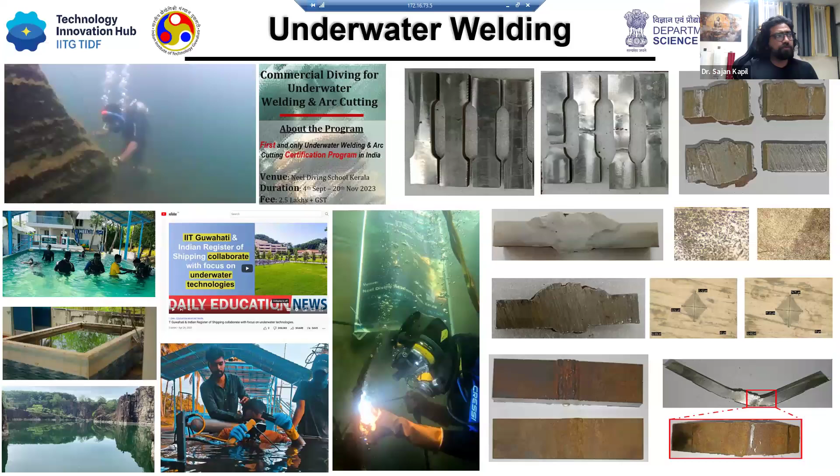I would like to add about a work we are doing at IIT Guwahati called underwater welding. Underwater welding we don't do. It is being done at Cochin. Cochin has a nice facility with our partner where you can learn underwater welding, the certification program. Till now in India, there was no indigenous underwater welding certification program. So we talked to IRS and asked, can we build an underwater welding course? I will do the testing.

We failed. It took us 2 to 3 years to come up with a proper procedure of what they need to do at the diving facility. They send the samples to me and I test, and we made the course curriculum so that they build appropriate samples, appropriate heat treatment, then the mechanical testing can be done, and then they can pass and be certified.

But I'll not certify. IRS will certify, and that makes a big difference because now these students are eligible to do underwater welding, and not only in India. In India, I'm even finding it difficult because it's just been done, but there is a lot of requirement in other countries where it's mandated to show certificates from these registers, the class societies, before diving and doing welding, right?

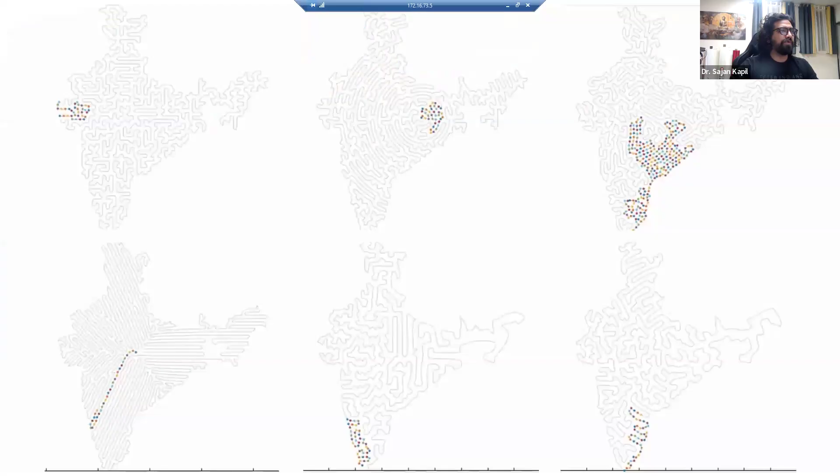We conducted its third version this time, and we have got 17 entries this year. Many from across India are coming to IIT Guwahati. This is one of its kind in the world. Of course, RoboWar was there, but Aqua Wars was not there. Three years consecutively we have done it, and maybe we'll do it for a few more years. So, like I said, what we do at IIT Guwahati, we are good in this.

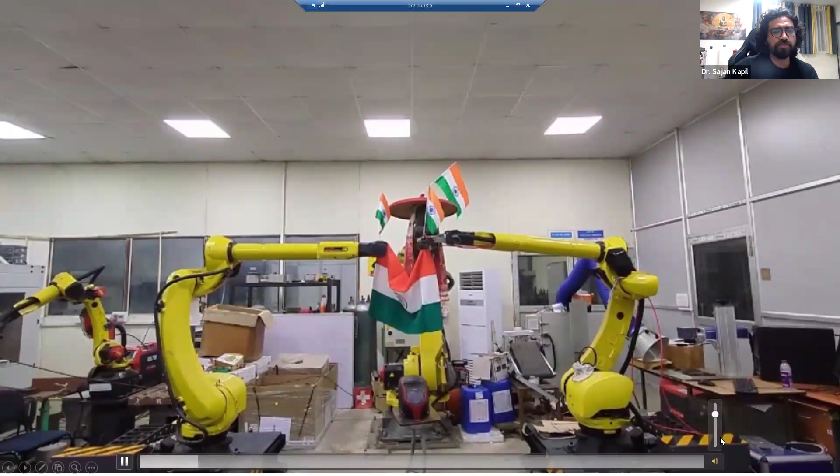So let me show you this video and end the slides. A video of a dancing robot. Sound you may not be able to hear, but there's a nice sound of a song by A.R. Rahman. But right now, you can just have a look at how we can make these robots dance, because that's what we do. We do path planning for 3D printing.

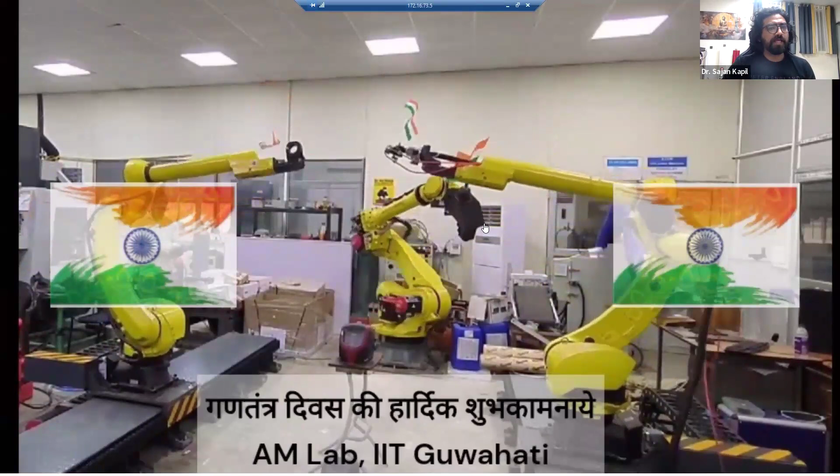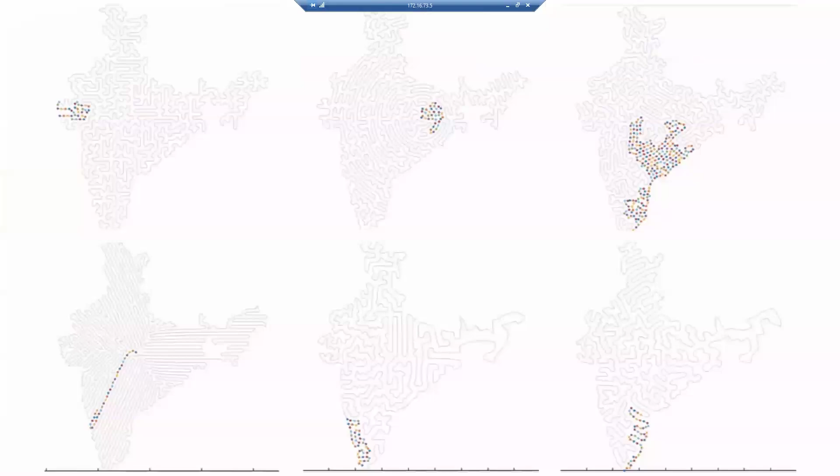Thank you, Professor Kapil. It was an enlightening talk. So many details you have given. I will open the session for questions. There is one question from Mr. Kamal Palit. Would you like to bring him to the panel, or shall I read out the question?

I can add him to the panel, sir, from the background. Just a second. Mr. Kamal Palit, you're in the panel. You can address your question, please. Mr. Kamal Palit, you're online. You can just put your question. Okay, perhaps I'll read out the question. Mr. Palit, I've seen your raised hand. Please. I think we're not able to hear Palit, sir. So maybe it's okay, I can read his comment.